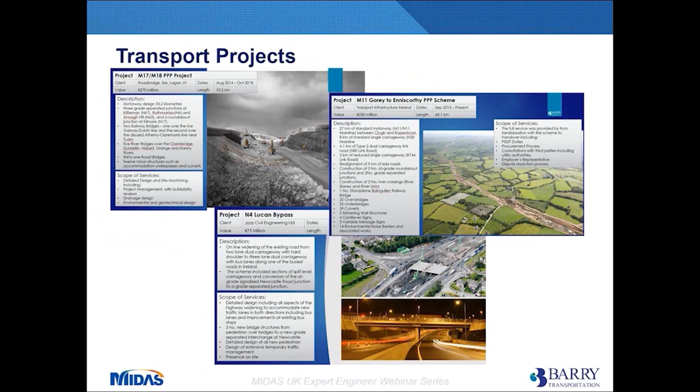A little bit about myself. I have over 15 years experience in structural bridge design. I'm a chartered engineer, and I specialize in concrete bridges, but over the course of my career, I also worked on a number of steel and composite structures. I started my career in Czech Republic, where I worked on a few motorway schemes, also in Slovakia. And after moving to Ireland, I worked a number of infrastructure projects here in Ireland and also in the UK.

Now let's have a look at what makes footbridge design different from a standard road or rail bridge, and what challenges the designer may have to face when designing a footbridge.

I would highlight key points related to footbridge design: aesthetics, structural robustness, and need to pay attention to stability and vibration. It is by no means unique to footbridges, but with the footbridge design, we may encounter more often these specific points, and they tend to play a bigger role at practically every footbridge we may design.

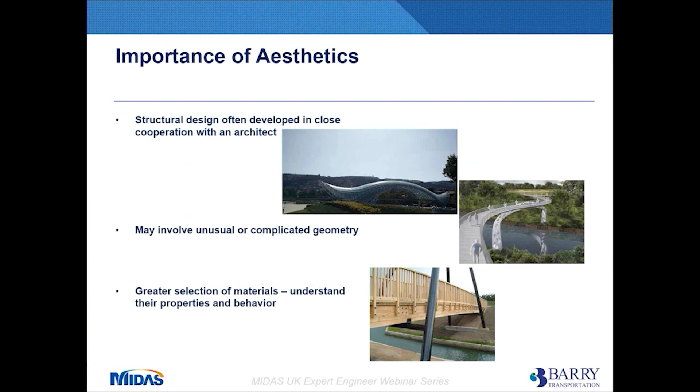And also with the footbridge design, it allows for greater selection of materials. So we as designers need to understand the properties and behavior of these materials, even those we do not normally use for road bridges or rail bridges, like timber or aluminium or glass and so on.

In terms of structural robustness, when we design footbridges, we want them to be lightweight. Quite often footbridges, they are very slender, airy structures. And at the same time, we have to ensure that they have sufficient stiffness and strength to maintain their stability.

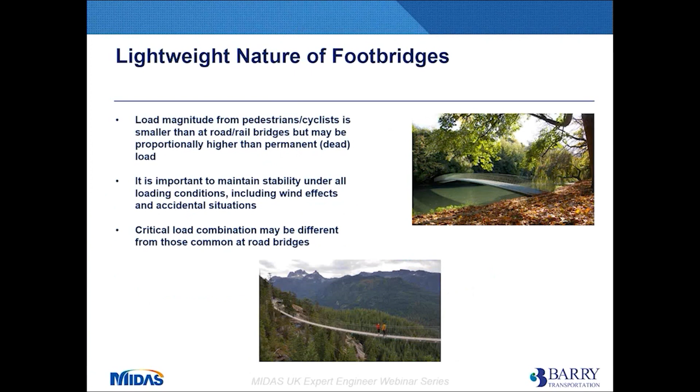It may be an issue for the wind effects, or the critical combinations for the design may be quite different from those we are used to when we design road bridges.

With the stability is also related a dynamic response and vibration. It is not really usually an issue for majority of short and medium span road bridges, but it is an important factor in footbridge design, because if the structure has a low natural frequency, it may lead to unstable lateral response and, in the worst case, loss of stability. But also it may lead to vibration, which may cause discomfort to users.

Some of you who visited Northern Ireland would recognize that this is the Carrick-a-Rede bridge, a suspension footbridge on the north coast of Ireland.

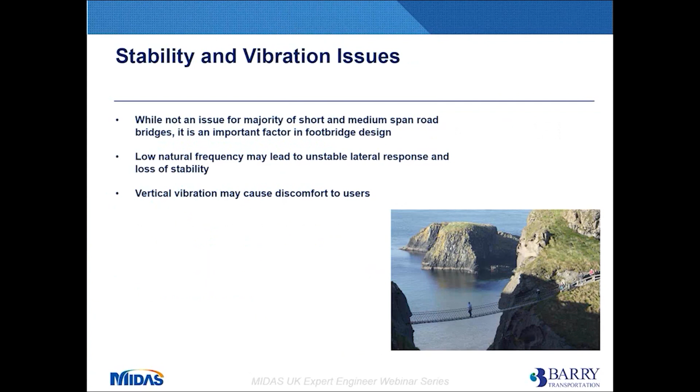Now we can have a look at some Eurocode requirements. Just a brief overview of guidance and principles in Eurocode, which are particularly applicable to footbridge design.

Footbridges are subjected to different type of live load. So the Eurocode 1, traffic loads on bridges, also contains requirements for dynamic loading on footbridges. Also, accidental actions would be quite critical for footbridge design, as well as wind actions, and some of the clauses in the Eurocode dealing with the wind actions cover the footbridges.

The structural design is covered by Eurocode 2 to 6. The same limit state principles apply to footbridges, their global stability, member verification as any other structure. So there wouldn't be any difference in this group of Eurocodes for the structural design.

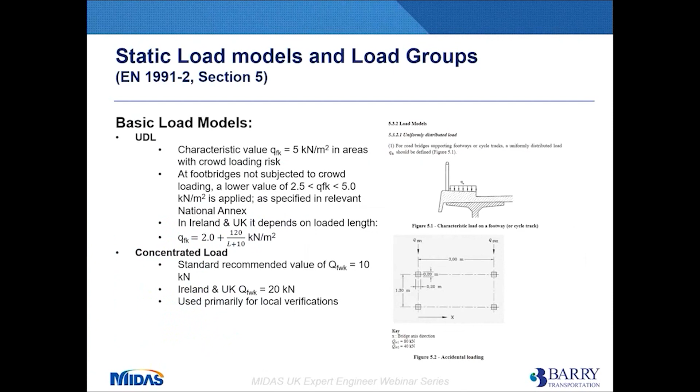We can have a closer look at the loading, because that's what differentiates the footbridges most from road and rail bridges. The static loads and static load models are formed from 4 elementary components.

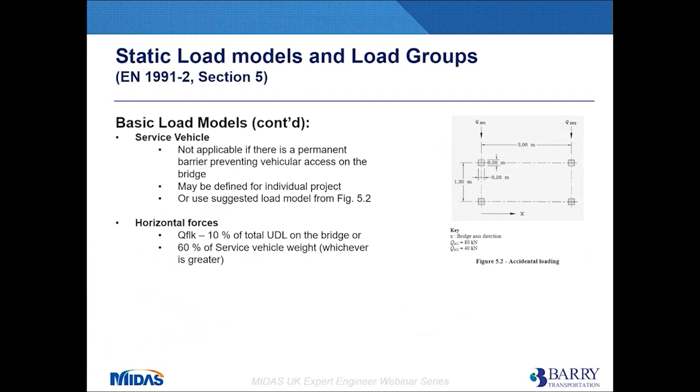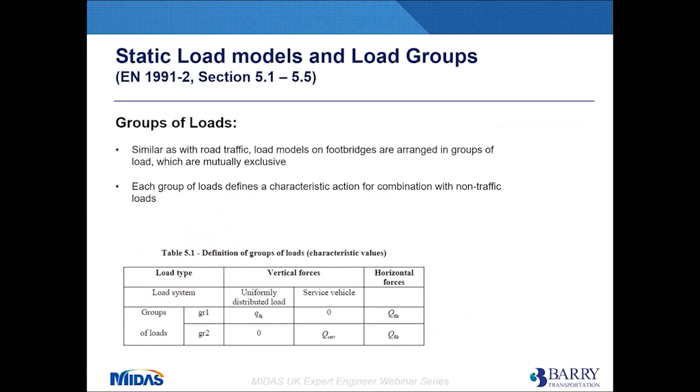These are UDL (uniformly distributed load), concentrated load, service vehicle, and horizontal forces. These 4 components are combined into groups of loads, a very similar concept to road traffic. On footbridges, we either combine UDL and horizontal forces, or service vehicle and horizontal forces. This group of loads is treated as a single live load action for the purpose of combinations and factoring.

The accidental loads are covered partially in the traffic loading code, 1991-2, and partially in the accidental actions code, 1991-1-7. Since accidental loads can have fatal consequences for the structure and its users, and strengthening the footbridge to resist the full impact would be uneconomical, we take measures to avoid them.

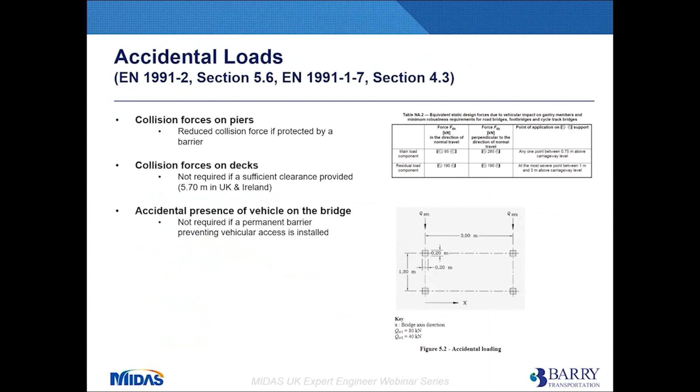Collision forces on piers of footbridges are reduced because the piers are usually protected by a barrier. For collision forces on decks, we can avoid application of this accidental load if we provide sufficient clearance, which in the UK and Ireland is 5.7 meters. Accidental presence of a vehicle on the bridge can also be avoided if a permanent barrier is installed which prevents access of vehicles onto the bridge.

Now, what differentiates footbridges most from normal road bridges of short and medium span? That's the application of dynamic loads. There are two key points which we need to pay attention to.

The first is the natural frequency of the structure, because if any of the natural frequencies are identical to frequencies of forces applied to the structure - from pedestrians, joggers, or cyclists - there is a risk of resonance, which may lead to unacceptable vibration or even loss of stability.

The second key point to pay attention to is vibration. Vibration from normal pedestrian traffic should not cause discomfort to users. That's why the code specifies a limit defined as an acceleration limit.

Dynamic effects of walking pedestrians can be represented by a periodic force, with a typical frequency between 1 and 3 Hertz. In the horizontal direction, the effects of walking pedestrians would have a frequency between 0.5 and 1.5 Hertz. If there's a group of joggers crossing the bridge, that may induce forces with a frequency of about 3 Hertz.

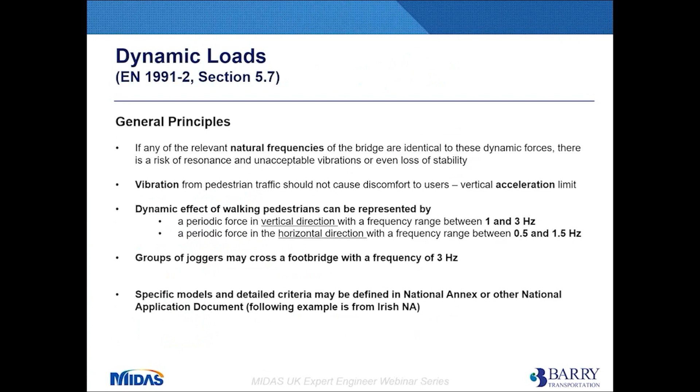So we can see that this range, from 0.5 to 3 Hertz, is a critical spectrum, and if any of the natural frequencies of the structure falls within this spectrum, there is a risk of issues related to vibration or stability. Specific models and detailed criteria for how to fulfill this and ensure the structure is stable are defined in the national annex or other national application document.

For the UK and Ireland, Eurocode 1 specifies the maximum vertical deck acceleration, which has a limiting serviceability value in the range between 0.5 and 2 meters per second squared. The exact limit value is calculated based on a formula in the code, and it depends on the site usage, route redundancy, and structure height.

The dynamic effects of pedestrians or groups of pedestrians are represented by the application of a vertical pulsating force which moves across the span of the bridge. Again, there's an exact formula in the code which helps us as designers calculate the magnitude of this load. It depends on the natural frequency and other factors.

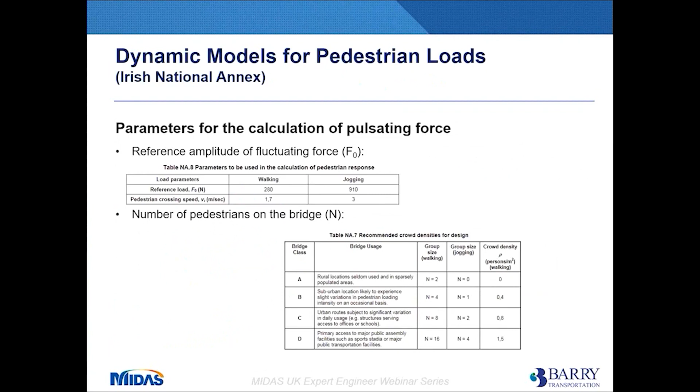Footbridges, for the purpose of dynamic loading, are split into 4 classes depending on location and usage, and the dynamic force applied may have a different value depending on the bridge class. Also, the pedestrian crossing speed - how fast they walk - is also defined, which helps us define the duration of dynamic loading.

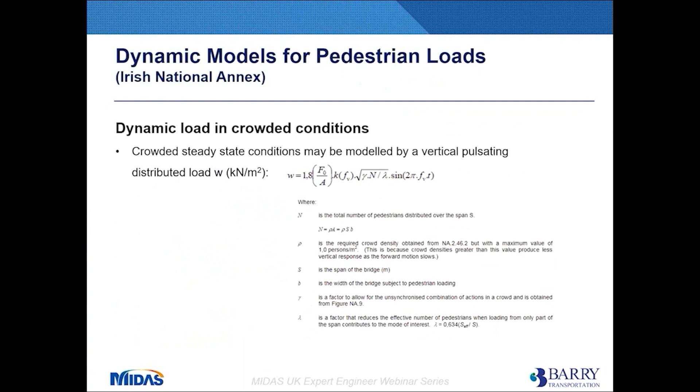The other aspect of dynamic loading is crowded conditions. If the bridge is located in a city center or close to a stadium, it may get into a crowded state. Then instead of using a single point force pulsating and moving across the bridge, the dynamic loading is modeled by a vertical pulsating distributed load over the area of the bridge. That helps us assess possible vibration issues.

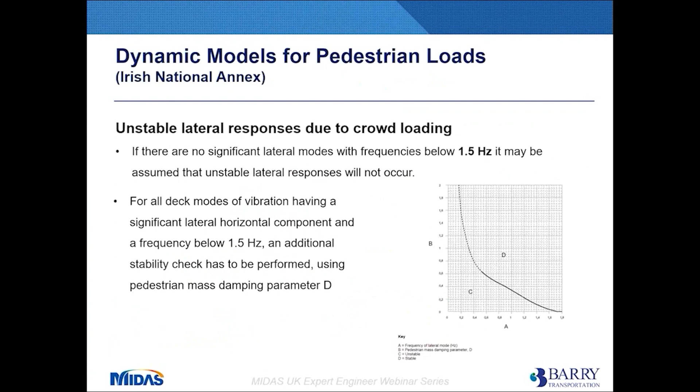The other requirement regarding natural frequencies, specified in the code, is that if there are no significant lateral modes with frequencies below 1.5 Hertz, we may assume the structure is stable with no risk of lateral instability. If any of the critical frequencies is lower than 1.5 Hertz, then additional checks must be performed, or we may need to redesign the structure or introduce damping devices.

Apart from pedestrian or generally traffic loading, in certain situations we may need to investigate the dynamic effects of wind loading, and the Eurocode dealing with wind loading also provides general guidance. It says that dynamic magnification effects due to vertical response can be ignored if fundamental frequencies in bending and torsion are greater than 1 Hertz.

Or we may need to fulfill an alternative condition. But taking into account that generally we want to avoid frequencies below 1.5 or even 3 Hertz, it means that for most bridges where we fulfill the condition for pedestrian dynamic load, we are fulfilling the condition for the wind loading as well. But for long span or special structures, this is something which needs to be taken into account.

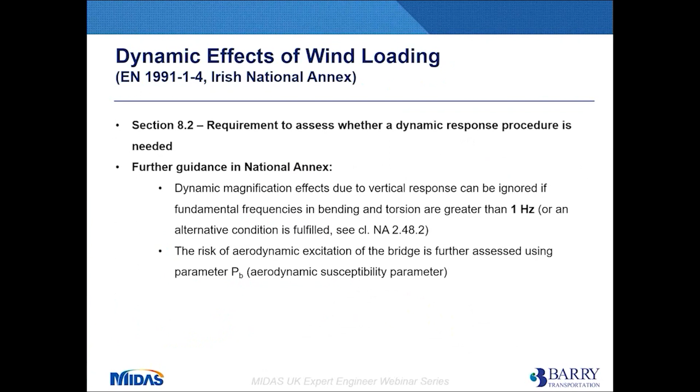So this was a brief overview of Eurocode requirements which are applicable to footbridge design, especially in relation to dynamic effects, which are the main point for the footbridge design.

Now we discuss how these requirements were applied on a Warren Truss footbridge. This structure has a span of 50 meters, a clear internal width of 3 meters. The maximum structural depth in the midspan was 4.2 meters, and both top and bottom chords of the truss are curved.

in a gentle radius to improve the appearance. Although in this particular case, the aesthetics wasn't a governing factor for the design, because the bridge is in a rural location with low flow of pedestrians.

The design of this footbridge was actually developed as a result of a value engineering exercise or value engineering proposal, because the original structure was a 2-span beam and slab, and we proposed a single-span structure to avoid placing the support in the central median of the motorway, and the truss works well for this arrangement.

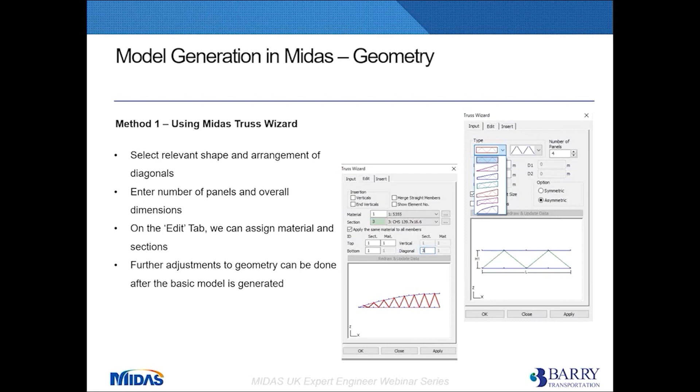We can select a specific or the closest similar shape of truss, enter a number of panels, overall dimensions. We can edit nodes or even assign material and sections, and then do the final adjustments when the geometry is generated. So this wizard will generate a 2D truss for the structure, like the Warren Truss footbridge. In our case, this would have to be copied and assembled for a full 3D model.

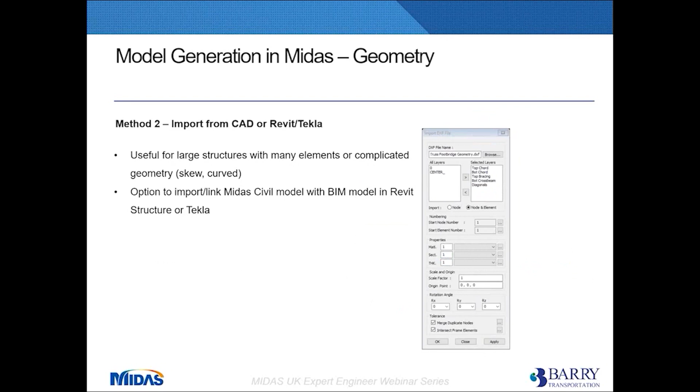The second method, which is especially useful for larger structures with many elements, or for complicated geometry when we have a skew arrangement or curved structure, we can import a CAD file directly, or there's even an option to import or link the Midas Civil model with a BIM model in Revit Structure or Tekla. That's done with the help of an add-on installed in Revit or Tekla, which allows the exchange of information between the two pieces of software.

The structure properties are standard for any structure. In this particular case, the steel truss is of S355 steel. The main truss is made from circular hollow sections. The rectangular hollow sections form the deck cross beams only. And the structure is articulated, sitting on elastomeric bearings.

So the stiffness of the bearing, calculated based on the properties of the elastomers, can again be included in the model.

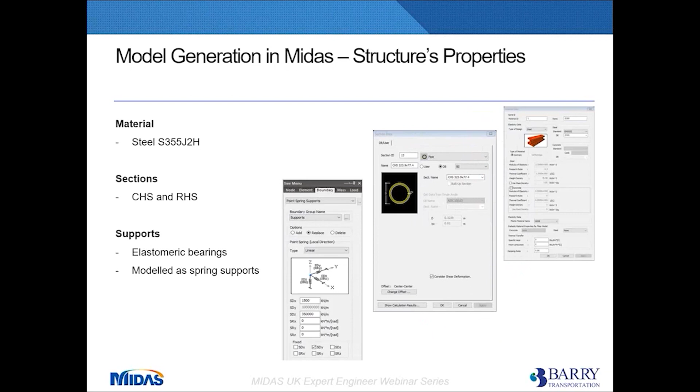There are some additional properties and settings which are specifically related to, or enabling us to perform, dynamic analysis. One of them would be a need to create an element on which we can apply the dynamic force, the dynamic pulsating force. In my case, I created a dummy beam on the bridge center line on which the pulsating force is applied.

The other important point for the dynamic and modal analysis is setting conversion of self-weight into masses. That's a tick in the structure type setting, convert self-weight into masses. If we want to convert other types of loads, like a superimposed dead load, into masses, that's done in the load menu using the load to masses dialog.

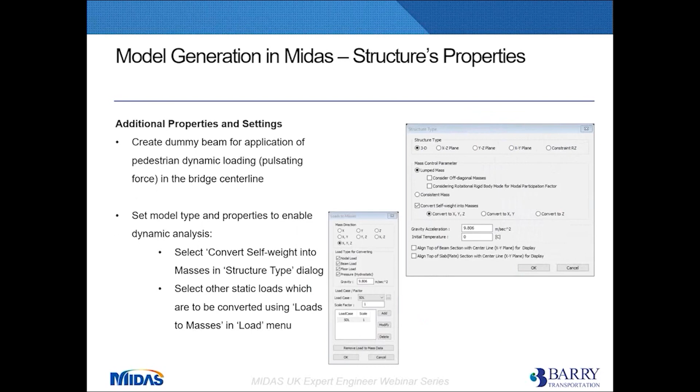The other properties and build-up of the model would be very similar to any other structure. So we define all the load cases and combinations and can analyze the structure.

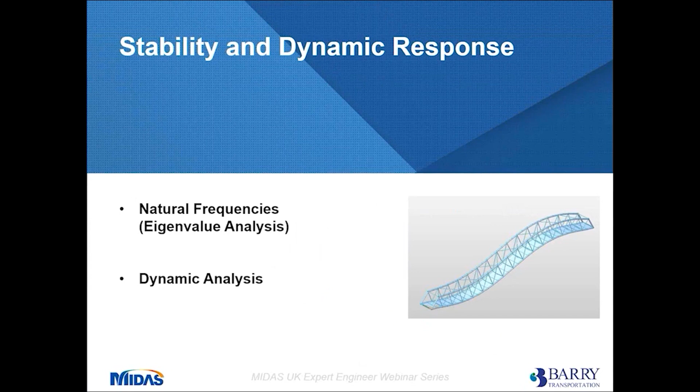We can now focus on how we verify or analyze the stability and dynamic response of the structure. I mentioned before that it has two key parts. First is the natural frequency, which in Midas is called Eigenvalue analysis. And the other key part is the dynamic response, so application of dynamic load.

To investigate the natural frequencies of the structure, we turn to the eigenvalue analysis control in the analysis menu in Midas, and we do it by selecting the number of frequencies we want to analyze. In this particular case, I selected 7. We may go for 10 or even more, because some of the higher frequencies may still be realistic and applicable to the structure.

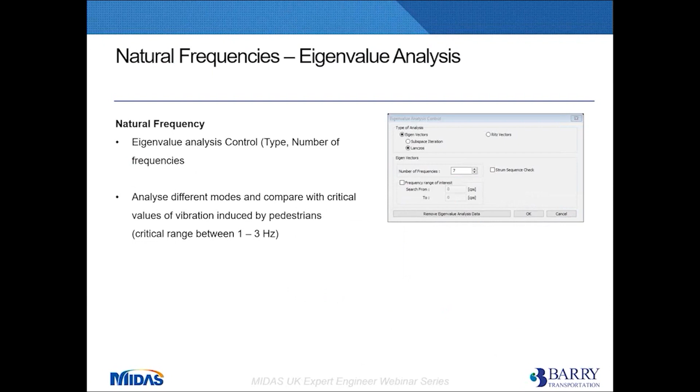Then we need to analyze different modes of vibration, because natural frequency is basically the frequency at which the structure vibrates naturally. In different directions, longitudinal, transverse, vertical, or twisting, the structure would vibrate at different frequencies. We need to prove that the modes of vibration are not close to the critical values of vibration

induced by pedestrians, which is in the range of between 1 and 3 hertz generally. The output from the eigenvalue analysis can be either numerical, like in this example. So for each mode, we can see the actual frequency. Mode 1 has a frequency of 1.68, which is actually close to 1.5 hertz. But at the same time, when we check what's the shape or mode of that vibration, we notice

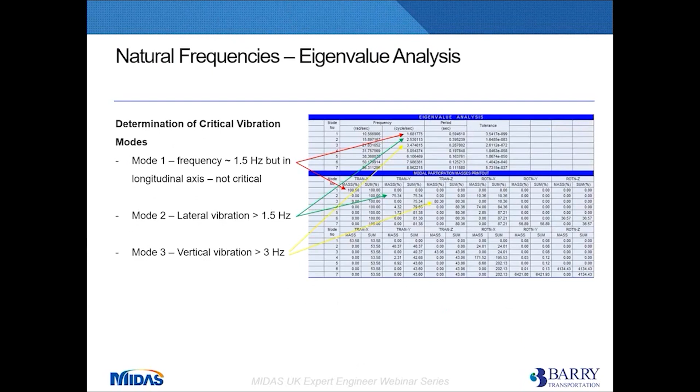that it is vibrating in the longitudinal axis of the bridge, so it wouldn't be critical. The second mode has a frequency of 2.53 hertz, and from the table below, we can see that it's vibrating in the y direction, so it is a lateral transverse vibration. The third mode is over 3 hertz, 3.47, which is in the vertical direction, so actual vertical vibration. This provides an overview, but we can also check the actual graphic results or see the exact shape of vibration.

On the following short video, you can see how it can be done in Midas. So we go to results, select mode shapes, vibration mode shapes, and then select the relevant mode. We want to display the legend, and when we hit apply, it will display the shape of the structure in this particular mode. Also in the legend, we can check the actual frequency and the direction in which the structure vibrates. Here we can see that it's in the longitudinal direction. For the second mode, we can see that the deflected shape has changed, as did the frequency.

It's exactly the same as shown in the table before. If we turn on animation and click recording, it will show us the shape or vibration in animation, so we can get a better idea how this mode of natural frequency works. The same would apply for the third mode, which is in the vertical direction, the classic up and down vibration.

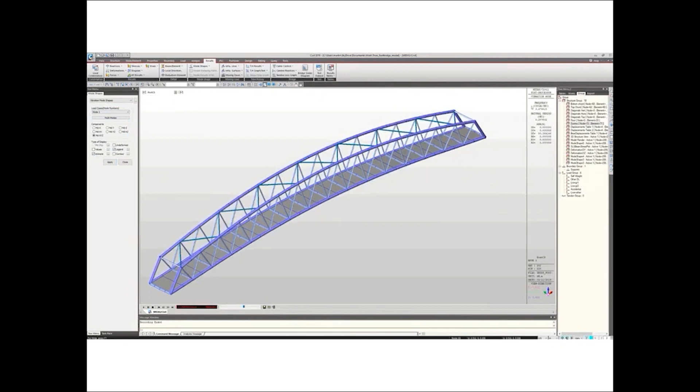So that was the first verification, natural frequencies. For the assessment of dynamic response, we want to prove that the vertical deck acceleration is within the limits set in the code, so that any vibration is not causing any discomfort to the users.

How is it applied? Well, we said that the dynamic load is applied by the pulsating or fluctuating force. In Midas, this is done in a way that the value of the force is calculated in time increments. So we create a set of force values at different defined times, and then the force is applied on a series of nodes along the bridge span.

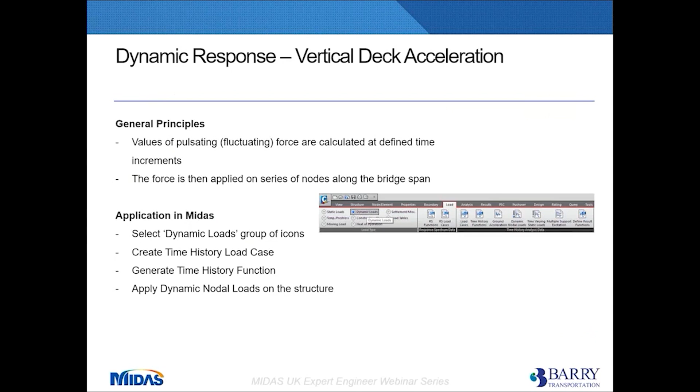The procedure for how to apply the dynamic load in Midas is not really self-explanatory, but relatively understandable, because in the load menu we have the dynamic load type and then a series of icons. So basically we follow those icons to create a time history load case, to generate a time history function, and then to apply dynamic nodal loads on the structure if we deal with node loads and not with the crowd condition.

In the time history load case, we specify the duration of the load, because dynamic load differs from static load in the time element. In this case, the end time in the dialog reads 29 something seconds, and it is actually the time it takes a pedestrian to cross the bridge, because in the code we have the design speed, or the speed at which a pedestrian moves across the bridge.

So we know the length of the bridge, 50 meters, so it takes about 30 seconds for the pedestrian to cross the bridge. Then we also specify the damping ratio, and in the time history function, we calculate the value of the fluctuating force for time increments. In this particular case, the time increments were 1/100 of a second, and the series of values can be calculated, for example, in Excel, and then copied into Midas, which creates this fluctuating force of sine profile.

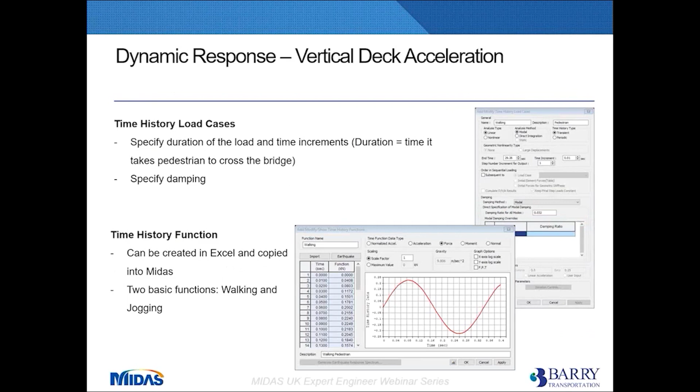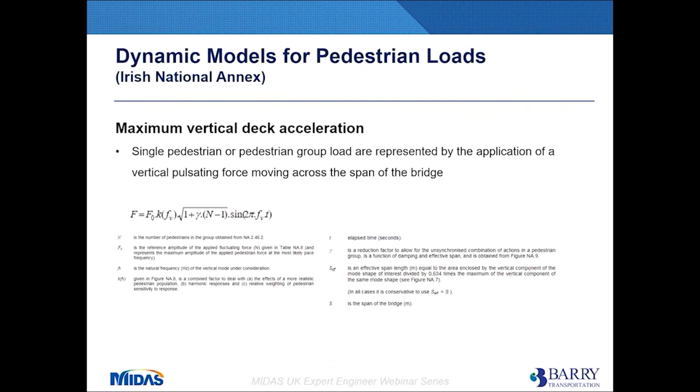For the Warren-Truss bridge we designed, we applied only the walking function, because it's in a rural condition and there wasn't a requirement for joggers. If we have a structure in an urban environment, or there's a specific requirement, we may need to create two separate functions for walking and jogging, because they will be different. So this is just a copy from the previous slide of the pulsating force. This pulsating force actually forms the time history function in Midas.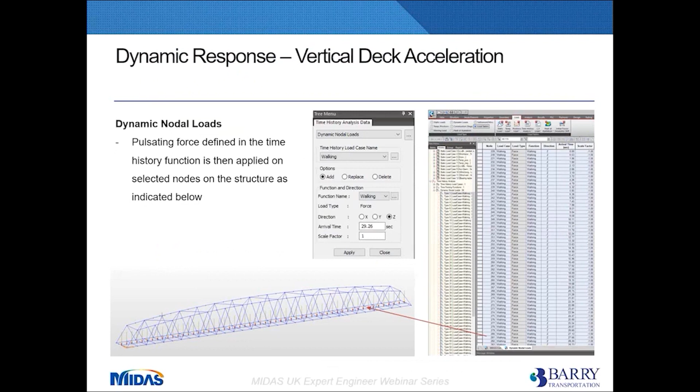And then this pulsating force, as defined in the time history function, is applied on selected nodes on the structure, as we can see on the screenshots below.

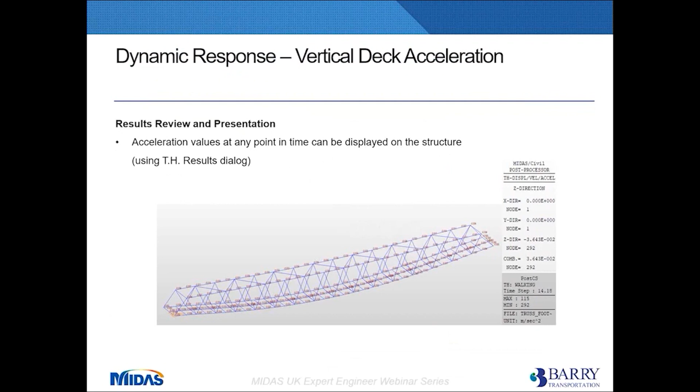We analyze it, and we can review the acceleration, forces, or displacement at any point in graphical form or even in numerical form. The problem is, if our time increments are hundreds per second, it's a lot of values, a lot of numbers to review. So it's not very practical to look at it this way.

But there's a function in Midas where we can create an envelope of results for any selected point on the structure, and this will create a graph showing the acceleration envelope. It's in the time history graph function.

So this is actually a plot from our Warren Truss footbridge. We can see that the peak acceleration was only 0.036 meters per second squared, which is much smaller than the limiting value in the code, equal to 0.5. And it is because of the low pedestrian loading, since it's in the rural condition, category A, so it is not expected to have more than 1 or 2 people on the bridge at the same time.

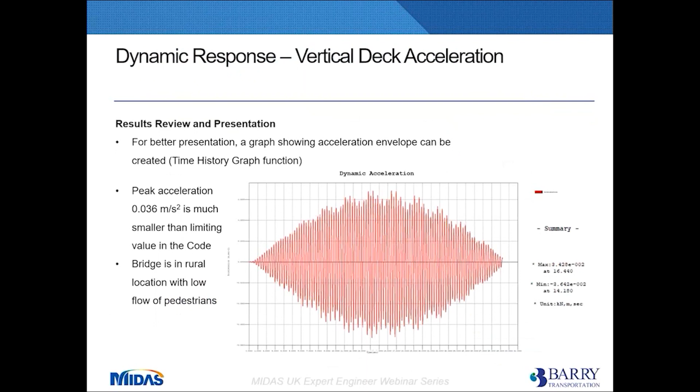But we can also see that the peak accelerations are close to the middle of the time period. It actually shows that the maximum acceleration would be at time 16 seconds, the minimum at 14 seconds. And it makes sense, because that's when the pedestrian is right in the middle of the bridge, so it has the greatest effect on the vibration.

Again, in the following short demonstration, we can see how to create this time history graph. So we go to Results, Time History Graph, and we define the function we want to create a graph for.

So we are interested in acceleration. We add a new function, create a name for it, acceleration. We select a node for which we want to create a graph or envelope of results.

The greatest movement is expected on a simply supported structure in the midspan, so we select a midspan node. We want to get accelerations in the vertical direction.

And we use it for the load case we created for the dynamic analysis. We can even select which mode is critical for this - we will use mode number 3. So this will create a function for graphing.

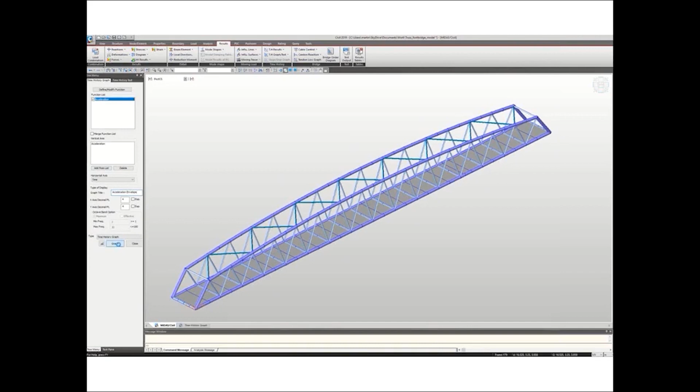If we want to present the graph further, export it, or use it in the report, there's a button next to the graph which is dynamic report chart. And it basically creates a reference of this graph, which we can use for the creation of the report.

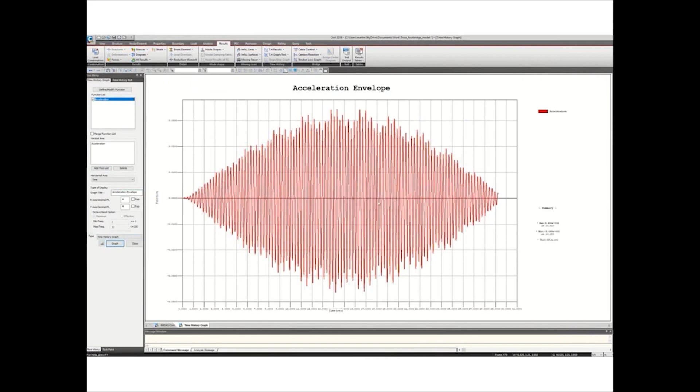So this was all related to dynamic analysis, investigation of natural frequencies, and vibration of the structure.

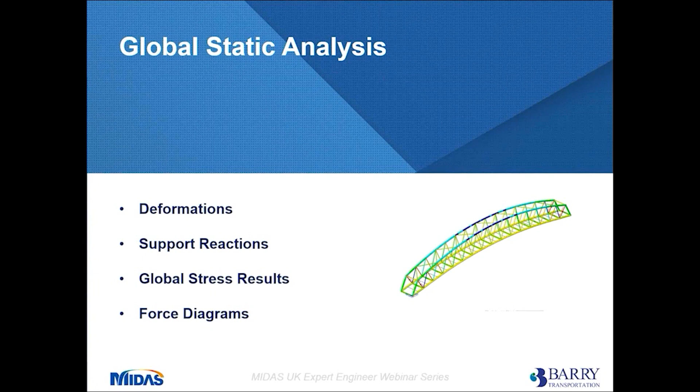The global static analysis is performed the same way as any other structure. We generally look at 4 main types of results, which are deformations, reactions, stress results, and force diagrams.

Deformation - we tend to take for granted that it's so easy to get all these results from the software, but it's good and prudent to review the deformation as a first step after the analysis, just to verify that the model behaves correctly, that the deformations are realistic.

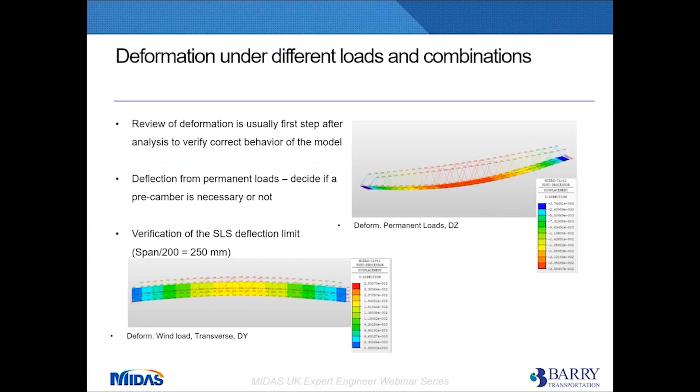It can also help us see if there's a need, particularly for steel structures, to introduce any precamber to compensate for the sagging from the permanent load. And we also verify that the deflection of the structure is within the limit given in the code.

Similarly, the support reactions - we generally want to use them for the bearing design, to create a bearing schedule and pass them to the bearing designer. But as a first step, we should review the model results and compare them with hand calculations, to have an idea what magnitude of reactions we should expect for permanent loads and live loads.

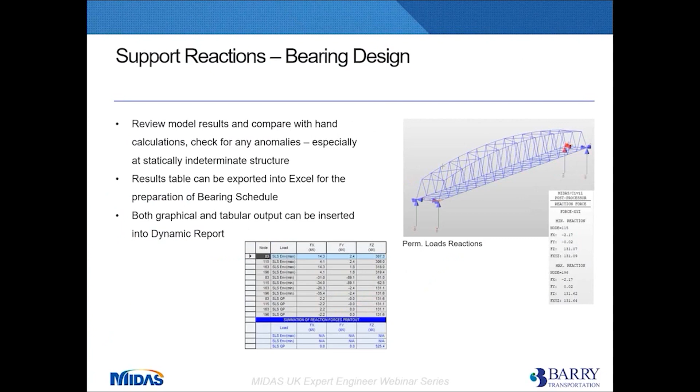And especially with statically indeterminate structures, we may check for any anomalies, any high reactions in a particular direction or moments, and so on. And both graphical and tabular output, as presented on this slide, can be inserted into the dynamic report.

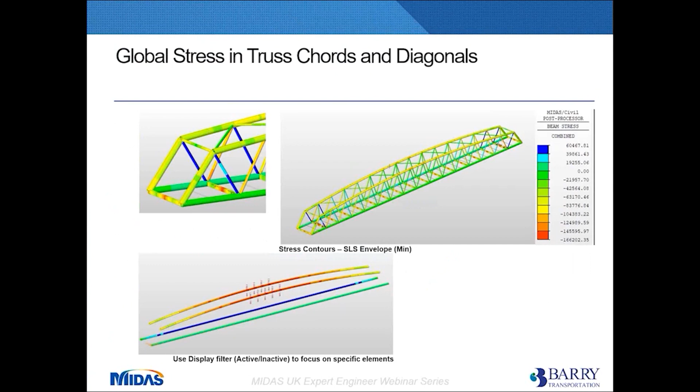For a steel truss like this one, an initial member sizing is based on the global stress in the main chords and the most stressed diagonals, which are near the supports. So again, this is something to help us with the initial design.

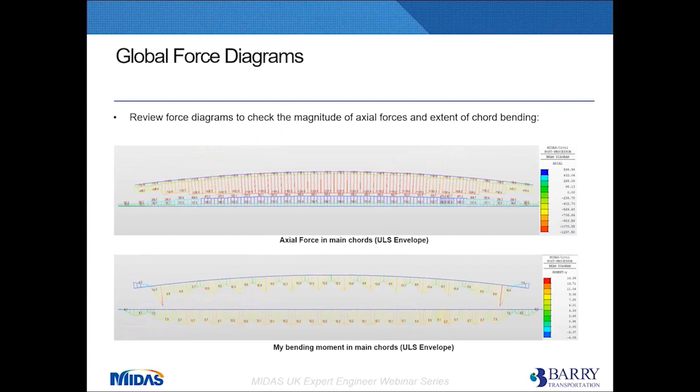And review of the bending moment diagram - it may not seem important for a truss, where we expect mostly axial forces, but if the structure is modeled like this particular one as a frame instead of using truss, tension, compression only members, then we need to verify that there are no high bending moments in connections, which would affect the member verification.

The member verification is the final set of checks, and it is usually the most time consuming because there's a number of hand calculations we need to perform. They are highly repetitive, for each critical member we need to perform the same set of calculations.

Quite often in the office, we have in-house prepared design spreadsheets which save time, but we still need to identify which members are critical. We need to transfer the results from the model and put them into the spreadsheet. So it's quite useful that Midas has a set of member design features which simplify this task.

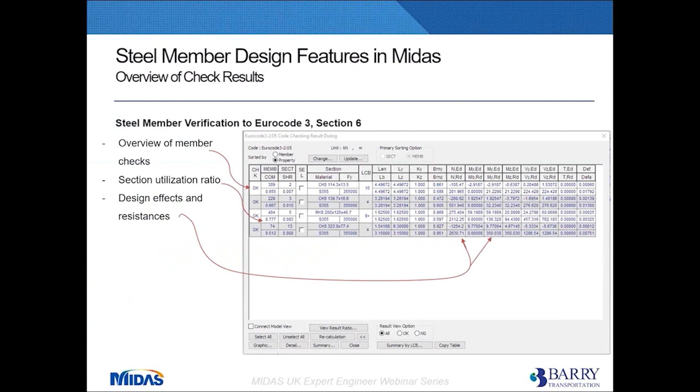The member design or member verification in Midas has 3 layers or 3 levels. The first layer is the overview of member checks. In the design menu, in steel, we have a code check option, and this table provides a very clear overview of whether all elements are passing the check, what's the sectional utilization, and also the design effects, the forces which were taken into account, and the resistances. So this is the first layer.

The second layer, if we select a specific member from the table, we can display graphic results, which provide more details, some design parameters, checking results. And again, we can export this or print it out.

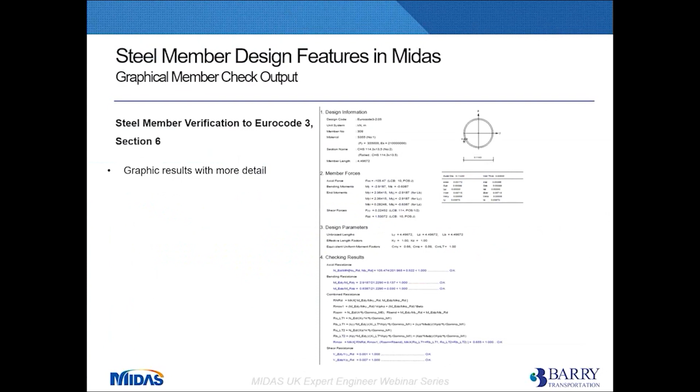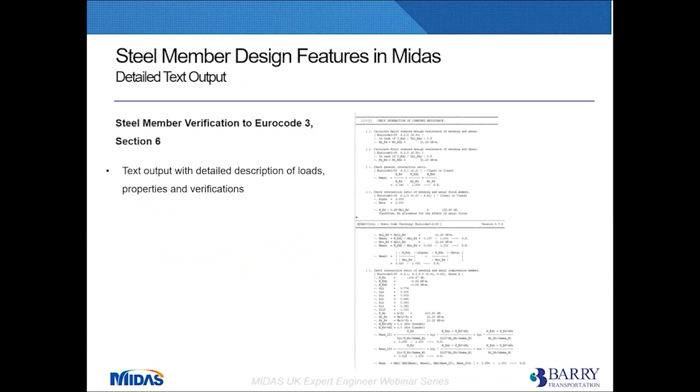And the third layer is the text output. Again, we can select a specific member and get text output with detailed description of loads, properties, and verifications, which is typically several pages of text, but very detailed and closely following the structure as required in the Eurocode. So this helps to simplify the member verification, taking into account the imperfections and so on.

Then the last part of this webinar, I will talk just a few minutes about dynamic report generation. We need to record our design process as designers for archiving. We may need to provide the information to the design checker. If we collaborate with other designers, other structures, we may have to pass the information on. And sometimes we want to present the results of our analysis and design.

So for all these reasons, the dynamic report feature in Midas provides an effective means of how to prepare such a report.

Dynamic report, the idea or how it works, is that we create model references which we want to include in the report. So it may be graphics, images, or screenshots of stresses, reactions, bending moments, and so on. We can also select some tables and charts, like the acceleration chart we have shown before.

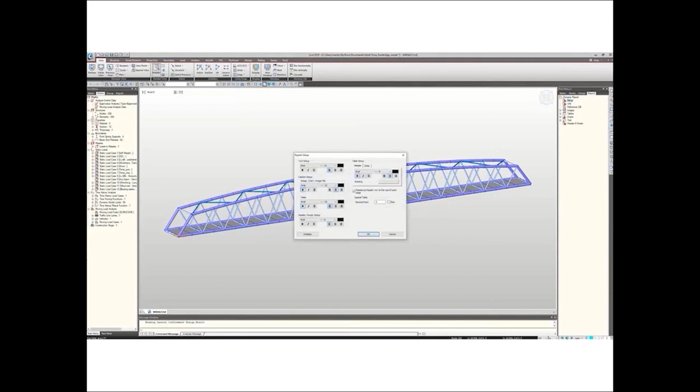So we go to the Report tab in the tree menu. We can select the basic formatting, font and sizes. We can select the information we want to include in the header and footer of the document. And then in the Tools menu, there's a dynamic report generator.

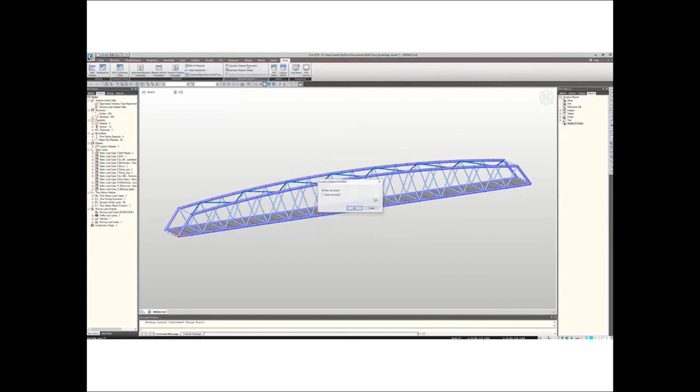So when we create a new document, it opens basically a blank Word document within Midas. We can add the header and footer we prepared, and then add information from our model. So there are groups of information: images, tables, charts, and text.

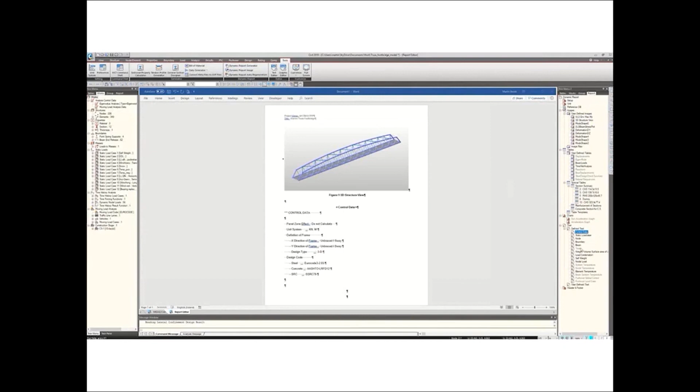Some of them are predefined and prepared automatically. Some of them we need to select ourselves. So we can include the structural view of the model. We can insert the control data of our Midas model, or a list of our static load cases.

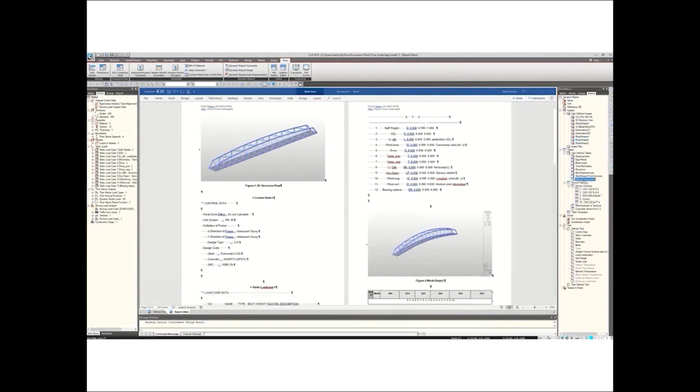When we analyze the natural frequencies, we may want to include some of the illustrations or figures of the critical frequencies and their shapes, as well as the table providing the information about all natural frequencies and their direction.

We also covered the acceleration. So when we create an acceleration graph, it can be inserted into the dynamic report.

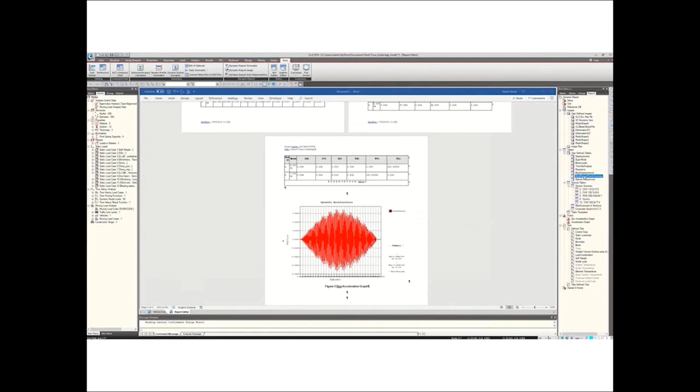And from the member verification, the table with the overview of member verification results, again, it can be inserted into the report, providing the overview of the member checks.

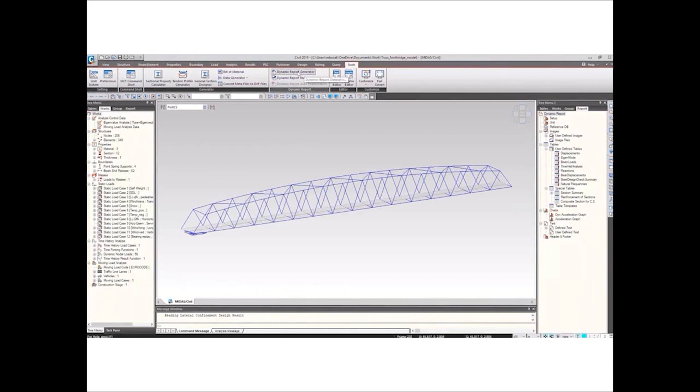So then we can add our own information, explanation, or notes and save the report as we would do with any other Word document. If we want to update the report, again we go to Tools, Dynamic Report Generator, and instead of creating a new document, we select Open Document, and select the report we created before.

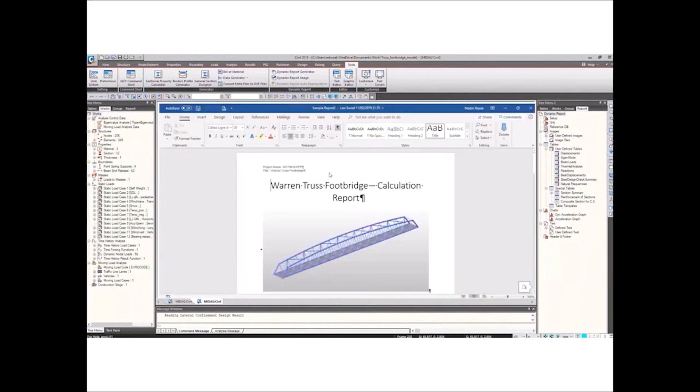Another menu, Dynamic Report Auto Regeneration, is highlighted. We can select information we already have in the report, like images, tables, or charts, and tick boxes of which ones we want to regenerate or update with the most current values from the model.

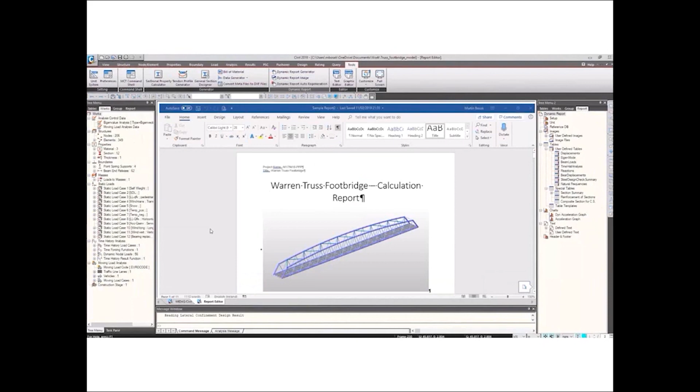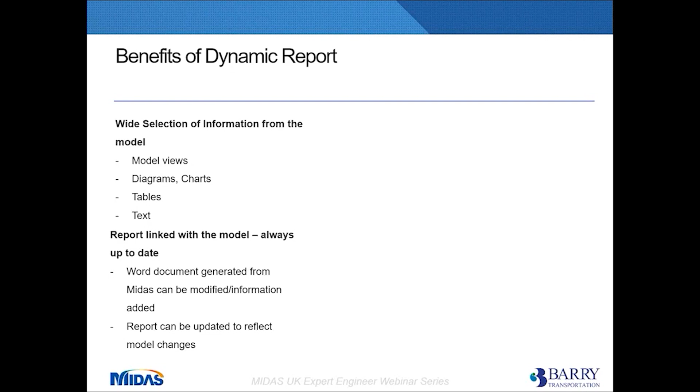The benefits of dynamic report are obvious. They allow us to select various types of information from the model: views, diagrams, charts, tables, or even text. Because the report is linked with the model, we can make sure it will always be up to date. Since it's generated in a separate Word document file, it also opens the possibility to add additional information and modify or format it as we wish. The report can be updated to reflect any model changes.